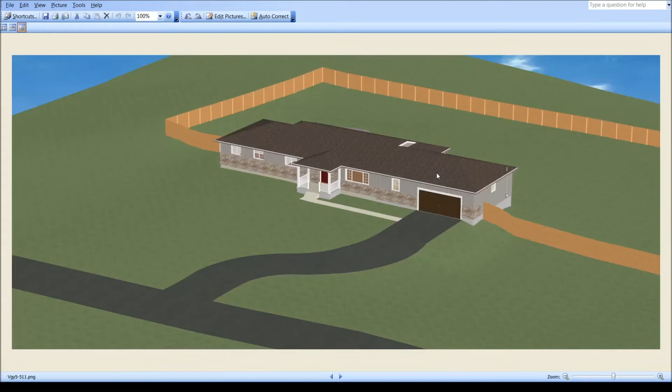Particularly I kind of like how this wraps like that. I kind of like that as opposed to this. This is fine. Particularly I think some sort of little window has to be in here. It's probably going to be tall like these, just to fake it out, and it'll be very high in the garage just like that one. Something like this, where this is pretty high. You'd be able to see out that window from this stair, but probably not from the floor.

So that was the final result of making a straight plan. It's probably doable, but there's the landscape situation over here, and the next little film is silent, but you'll be able to see what I mean, the challenges with swinging that down. This is all very nice, though, I have to say, how this sets up here, how it works out here.

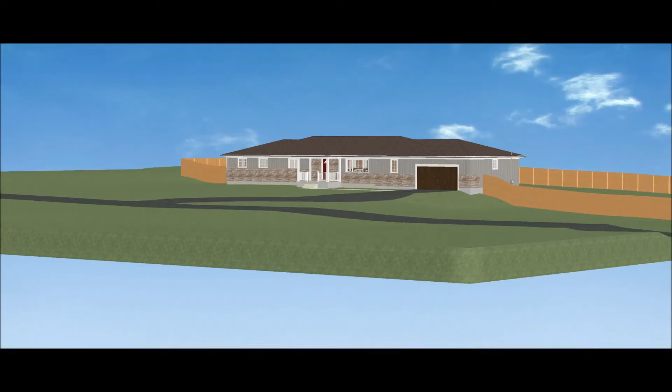Leaving that alone in spite of the foundation still showing. There's probably a question on whether, once you build all these stairs down here, did you want to add any more finished area? And I don't think we can add that much, because I think there's going to be plumbing work possibly traveling across here and somewhat in front of these windows. That might be able to be avoided, but it should be recognized.

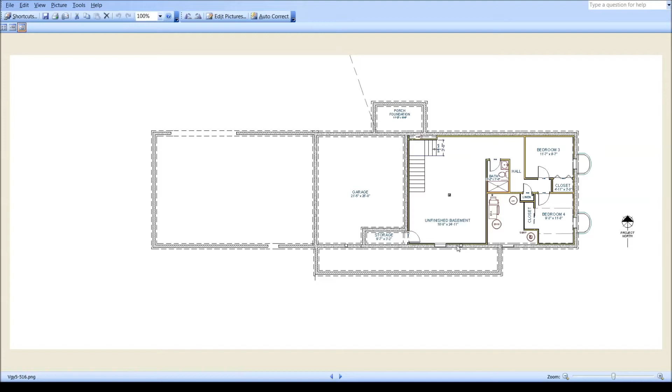I do like getting some natural light into here, so I would probably look into trying to see what could be done to preserve both that light and accomplish our plumbing. Returning to our regular plan, the angled one with the south expansion, this should say south addition, not west, which is this portion here. There were some things that definitely needed to be covered if we're going to firm up this plan, and I will try not to make this too headachy to understand.

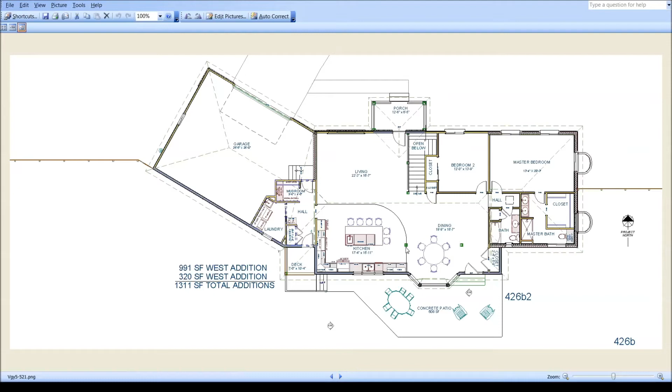But first of all, if we do this southward expansion and we don't elect to replace truss work through here, then we will need to have at least this column, and it seems to make sense to have two, to provide a beam to carry those trusses that are left here and any of the new framing coming in here. There is the issue of whether that ceiling plane then continues across because of the insulation requirements that are almost surely going to be necessary to be met.

And so there's plenty of clearance between those columns, leaving the table out there. It kind of looks dumb having the table centered between the, not dumb, but it's natural to do that, but it leaves a lot of space down here, and I'm not sure about it in any event, having those columns there. However, if this ceiling is not replaced through here, this framing is not replaced through here, the columns are necessary, and I made a little film for you to see what that's like inside.

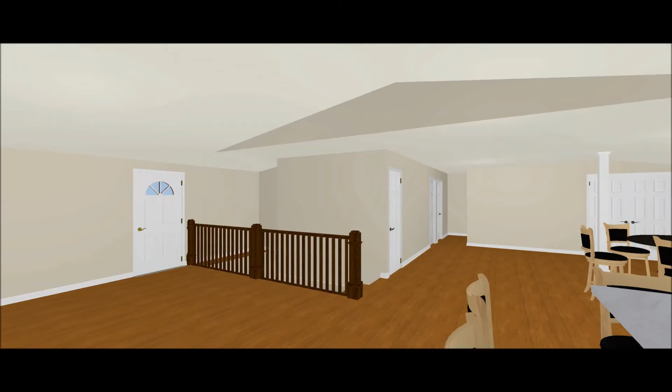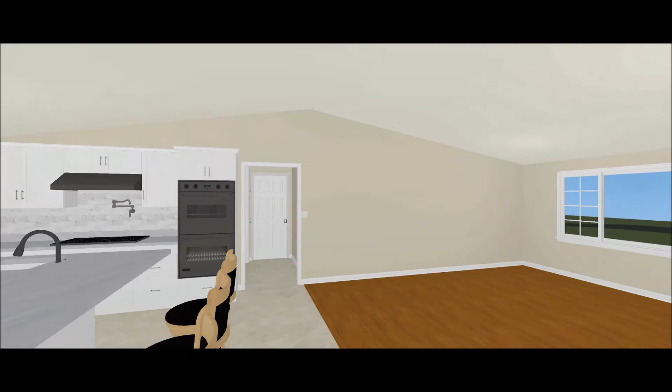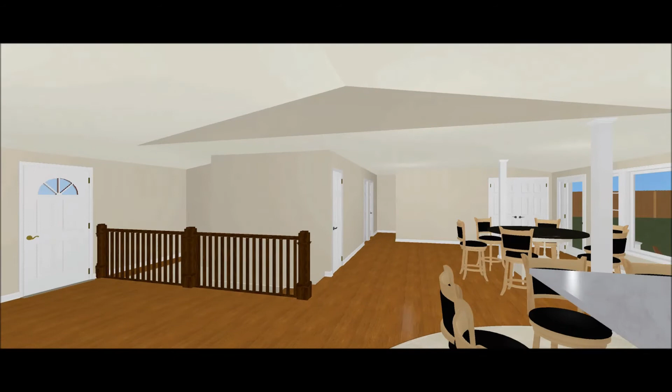And the next turnaround really just showing this sloped portion of the ceiling extending over to provide that insulation space with this table pushed out that way. And then a turnaround with the columns eliminated and the required slope ceiling coming across here, and that assumes new trusses at least from this wall to this wall.

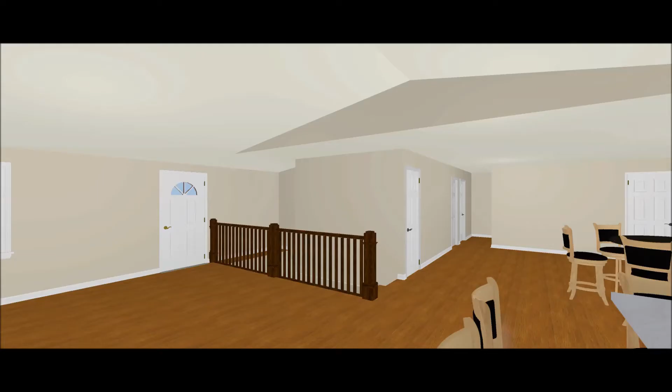And I'm not crazy about that either. I'm not very crazy about this little cabinet out here. This might be better if this closet were just expanded with bigger doors and that was dropped. I don't like that presentation out here.

But to show a few more things with regard to this ceiling, not to exhaust you with it, the bay window can be eliminated. As I said, I've never been crazy about the interface here. I do like that it gives you this long view down through. The best view is down through this way, but it can be eliminated in favor of something like this. This is a big picture window. I think this is almost 6 foot. These are a couple flanking 30-inch windows here.

It solves all the headache of that stairs. It gives you a little more room on the patio, as well as eliminating that expense. But if it's eliminated, you still have plenty of room at that table. People can still walk behind a seated person at just about 44 inches there, with a 60-inch round table. So this is a cut through this with that wall. Whether the bay window's there or not doesn't affect what we're talking about here.

This is that dining room ceiling, and I don't really like that this slope has to be here, but more in a minute. This is the beam proposed if this column is here to carry the rest of those trusses and any of our new roof load that's going to be bearing down on top of those, presumably.

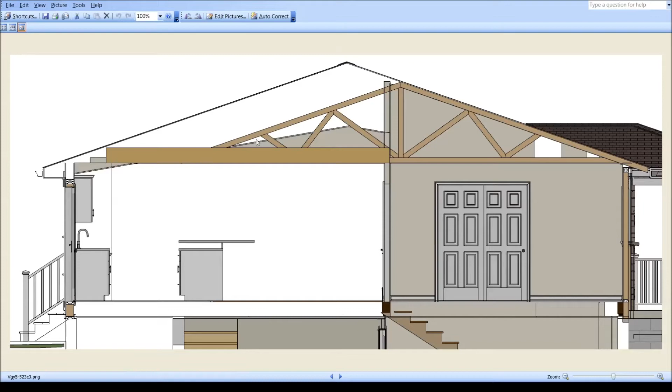The next little move that a person could do is move that wall in some and provide some bearing for new joist members, ceiling joist members through here, to which these could be fastened and borne that way, and then pushing that wall back.

Here the roof is shown just coming out, providing this big wide overhang. I did not model that, but this does reduce the footprint by a little, bringing that down to 1231 total, and this happening inside. I'm no crazier about this than I am about a few other things. This really trims the view off this way, just from that window though. But it's still very effective, and at least now there's not so much empty space up in here. This move assumes the elimination of those columns then, to just provide one open space.

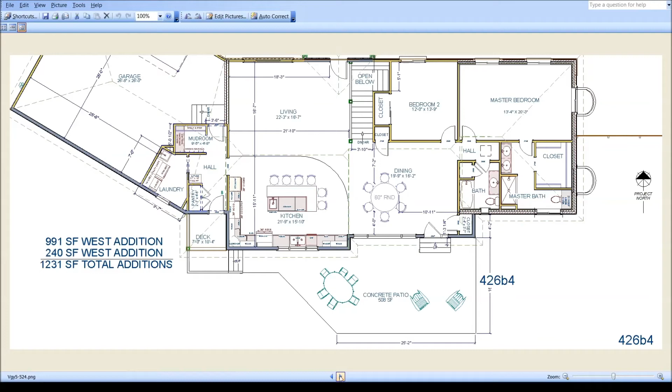And it looks something like this outside. You'll just have to ignore this little scrap I've got up in here where that wall is shifted back. And this roof starts getting a little more complicated, but you don't see this from the street.

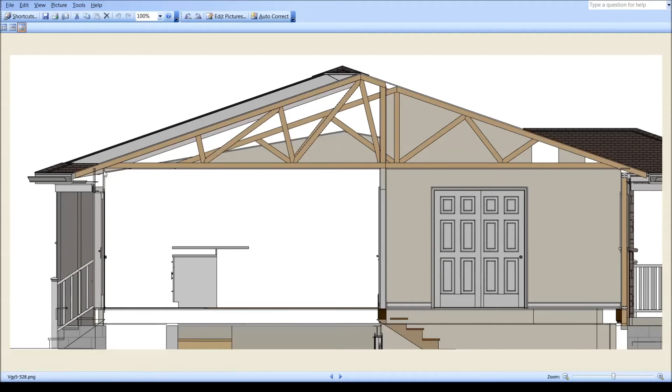This next 3 or 4 is just me trying to create a flattened ceiling in that dining space that is separate from the sloped ceilings out in the kitchen and living space. Because if we try to run a regular truss through here, this is not enough height for us to get that insulation. If we frame that roof stick frame without trusses, it takes 2x8s at the roof and 2x8s across here. And what I've done here is drop these ones down below where that slope is.

This gives us plenty of, not super, I mean it's not 10 or 12 inches, but it is enough, about 8.5, to get good insulation here, as well as our member bearing, if that's conventionally framed, that section. If a truss is used over it, we can have the truss come over and have a little ledger here with hangers. This ledger fastened to this bearing wall down to this beam, and the truss is built to accommodate that. And again, decent heel height.

And then your finished ceiling through the dining room area only becomes 7'6". The existing ceilings are about, I believe, 7'11". So this is about a 5-inch drop in that area. But maybe it makes sense once the columns are eliminated to get rid of that slope that runs through there. The slope is fine in the other area because it raises up to the cathedral, and it's really fine over the stairwell as well because it's less paid attention to.

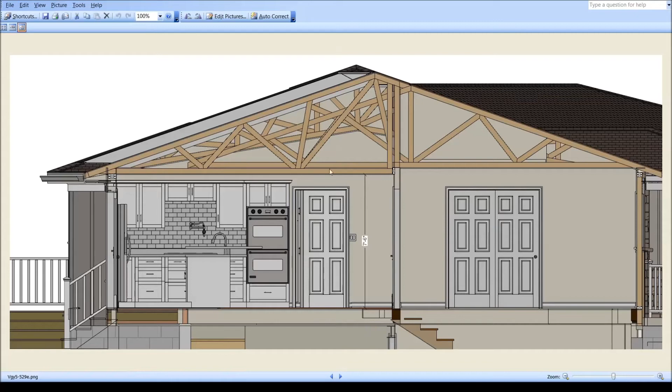There's your old trusses just left in place, and the new ones put in here with their new requirements, and those ones probably just nailed to these. There won't be any weight left on these because they'll be stripped off in the event this sort of thing is done. It does require you, though, instead of replacing the trusses from here over, to pick up these last two as well, so that we can get that whole flat ceiling across here.

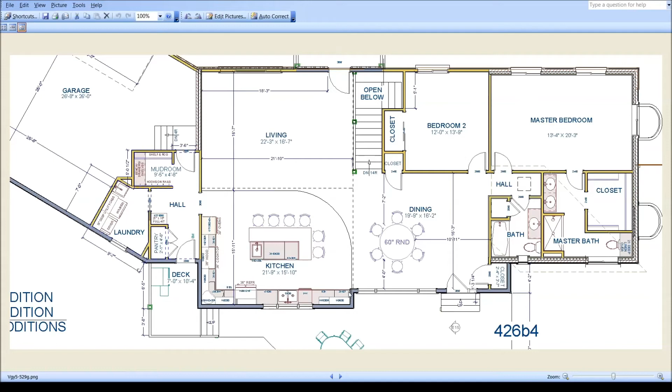So inside with this B4, which is the shift back here, this ceiling is all flat at 91. Probably you just flatten this whole hallway out, I would think, just fur it down some, so that all of this becomes 91. And then this all becomes the vaulted ceiling to 10 feet. I think this margin probably should move over to the edge of this, as you see here, where we bring that out like that.

And down the hall you can see that raised area. That has the attic access, so you can leave it high like that and kind of conceal that attic access, or put the attic access somewhere else, I don't know where, probably in this bedroom, or you just fur it all the way down. And at that end, I think that looks perfectly legitimate coming across like that.

And so here's a quick turnaround with this arrangement then. Eliminating the columns, lowering this whole thing to 91. You've got to pick up these two trusses here and either stick frame this or pick up half trusses over to this wall here. But here's the rotation on that.

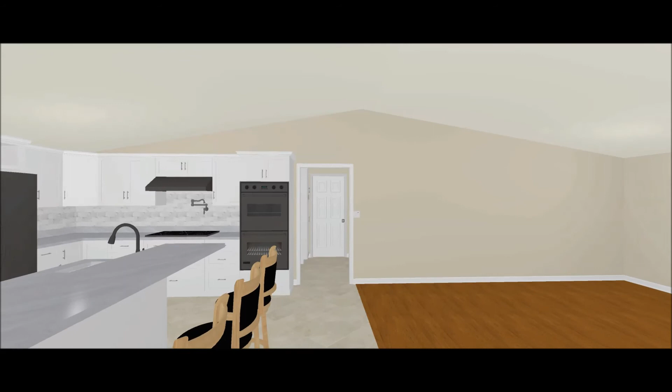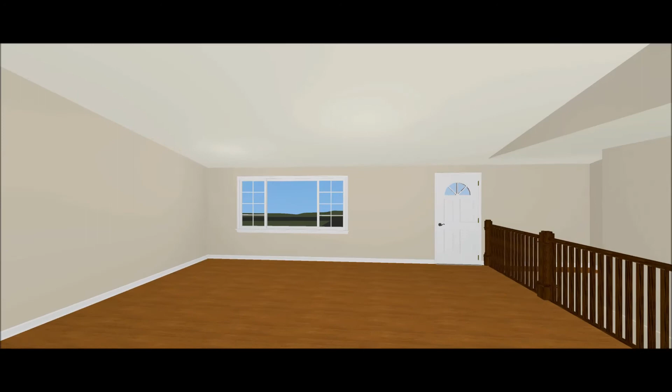Couple quick changes during the film. Got rid of that cabinet that I didn't particularly care for and changed these doors from two 24-inch doors to two 30-inch doors, and just got rid of that complicated framing there. And this goes to a swing door then from a pocket door.

So that changed there. And this window, there's a 2'7" margin here. I increased that to 3 feet. I think that's about as close as we can get to that porch in its existing size. And finally got rid of that last little wall there. We may as well have a wastebasket or anything. Besides that, it's a little goofy here, I confess.

But in this, where the camera comes back around, this door is open and you'll get a feel for what this space is here. I kind of like the bigger doors on this here. It brings the door closer to where you're going to need to get it. And remember, as you see in the film, all of these cabinets are only 30 inches high, so we don't have a lot of space out here in terms of food storage. So this could be shelved out in a creative way probably.

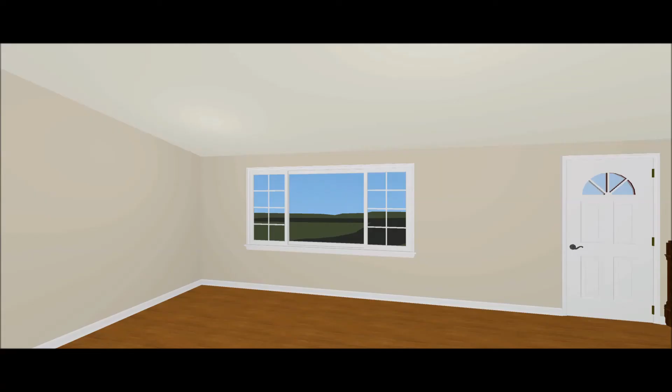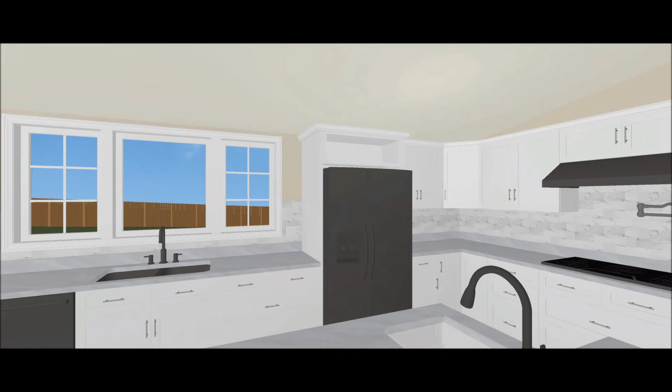Additionally, I did not mention at the time, and maybe you didn't notice, but this closet lost its double doors and now has, I believe that's a 30-inch door on it. And I'm sorry to drag this out and hopefully not create too much confusion. I already made this change here during the film, but earlier I had endeavored again with this laundry, and I think we did better doing what we did with that door.

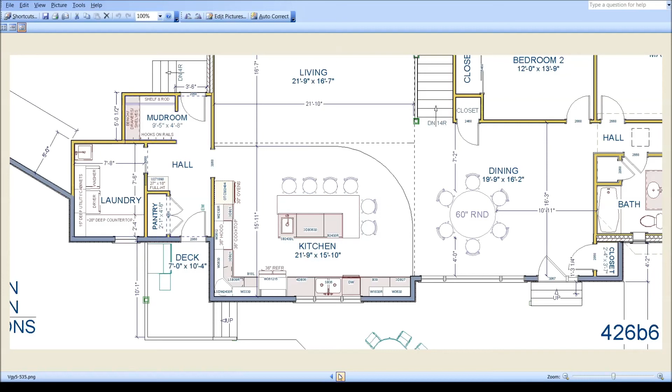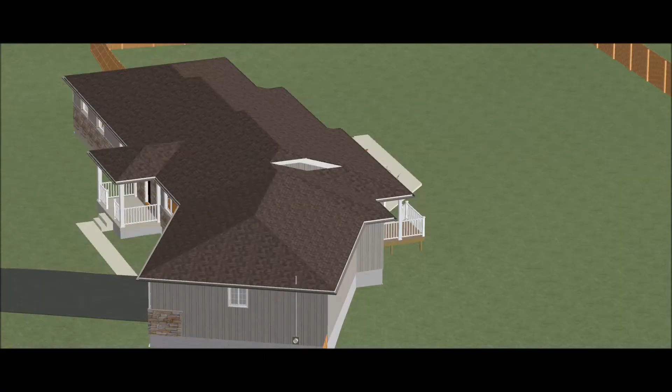But before that happened during the film, I took a look at rotating that laundry like this and having it more standardized. And so you ended up with this inside that garage. The roof is a little bit more complicated. But the laundry facility again is nice.

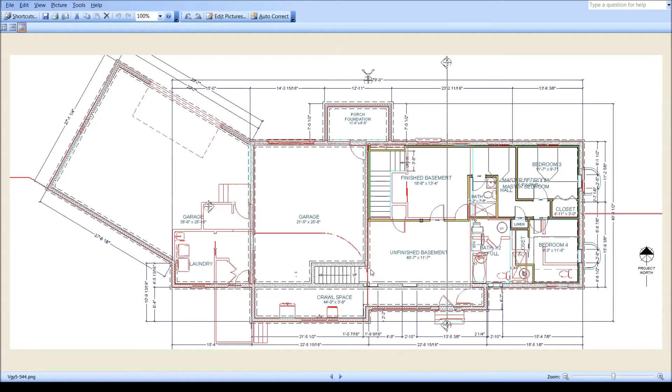You can see here where this is the kitchen here, and the plumbing is going to have to travel across here to get to that stack out to the septic. All of this plumbing is going to have to travel underneath this floor and then across this ceiling. So leaving aside the slight increase in complexity for the roof framing, this is those changes.

And you can see your dimensions here, where that goes from 26'8" to 24'5". But the laundry facility becomes quite a bit more usable in this configuration. And knowing also that if you wanted to change to a swing door here and increase the length of that closet, that can be done.

I think I did make a final move, squeezing that out a little bit, somewhere in that range, and then returned to this again once I had already squeezed the garage down to the pinch point anyway, to 24'5". I returned to this one again, the simpler framing, the simpler roof framing, and kind of made that similar to 26'1". We were down to 24'6". So this is a little better this way, a little more usable laundry room in any event.

And the same thing applies with regard to this door through here. A nice folding space here. I just have a sink in the countertop, but maybe there's not even a sink in that room. So that was another way, probably a preferable way in terms of its simplicity to that one. And maybe those doors are shifted over.